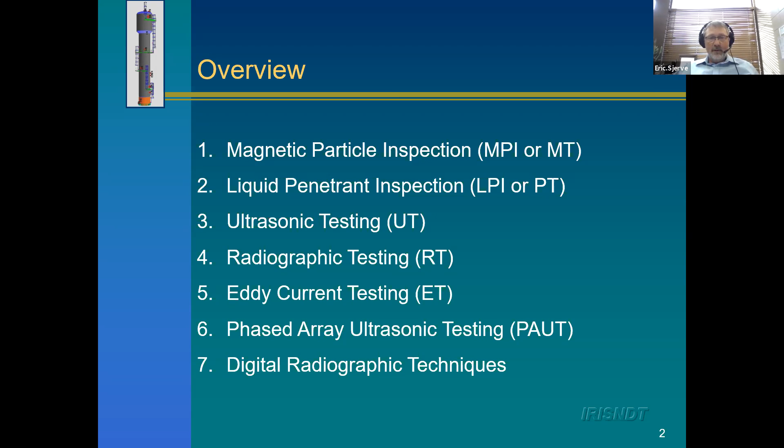All right, so the first one I'm going to cover is magnetic particle inspection. In Canada, we call that MPI. In the US, we call it MT, which is magnetic testing. MT is common in Alberta because we use American codes for most of the work we do, so you'll see that term MT. This is a technique that only finds defects that break the surface, and it can only be used on ferromagnetic materials. It can't be used on non-magnetic materials like stainless steels or aluminums. It has to be things like carbon steel.

With this technique, all we're doing is magnetizing the volume of the material, and that magnetic field is also with the surface of the material. If there's a surface breaking crack or defect, it's going to expel some of that flux. Then we put a powder or some sort of magnetic material on the surface, and wherever that flux is expelled, the powder will congregate and we'll visually see the defect.

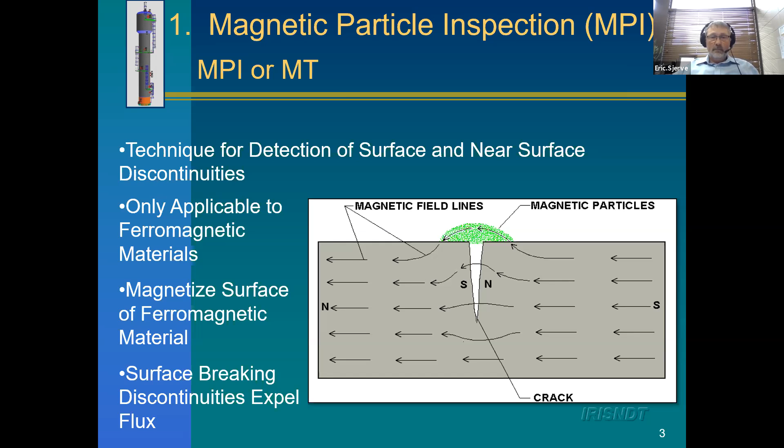So in Alberta, most of the applications use that yoke, which is the red thing on the right. All that is, is one of those prongs that sticks down as a north terminal or a north pole, one's a south pole. You touch it on the surface and it generates a magnetic field in the part. It's very flexible - we can use it in all kinds of constricted areas, on different configurations of welds. And it's good in the cold, good in the heat - it's just easy to use.

So most of the work is done using that yoke on the right. We also have big benches like on the left, but those aren't as common because most of the work in Alberta is done out in the field, which is good for those yokes.

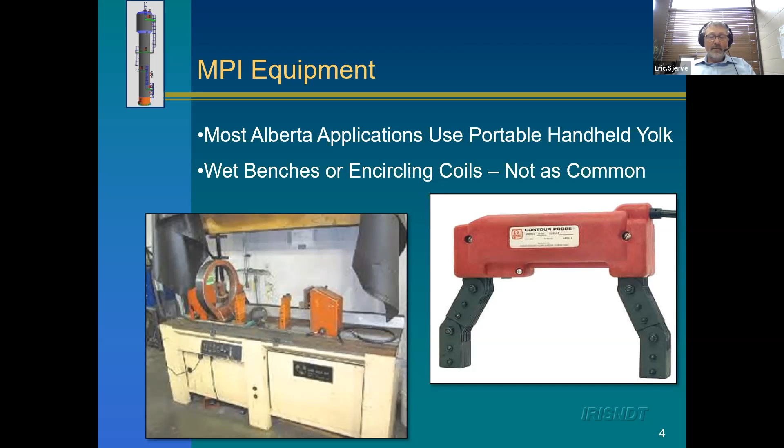And then these are what the magnetic particles look like. At Iris NDT, we just buy them by the truckload and we mix all of it ourselves. But that's just fine powder that's magnetic, so it's going to congregate at those north-south magnetic poles where there's defects on the surface.

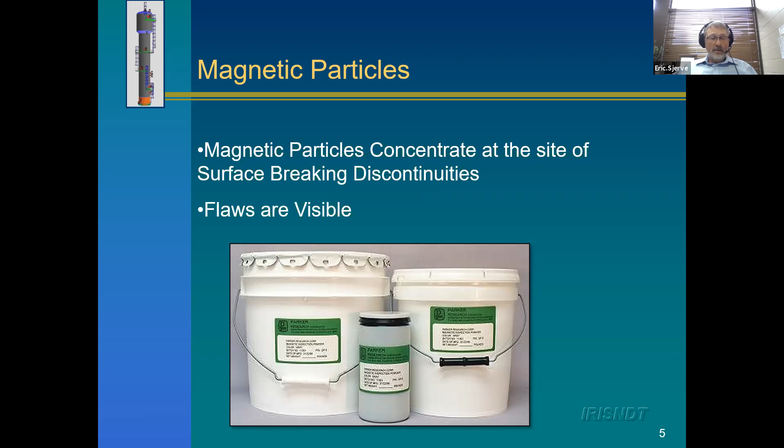So for magnetic particle, we have two ways of doing it. We can do what's called a dry magnetic particle inspection, where we spray a white paint on the surface and use a powder that's dusted on the surface. That powder will congregate where we have defects that break the surface, and we'll visually see the defect. This is good for rough surfaces, and it's good for high temperatures because there's no liquids there to boil off, so we can use it at high temperatures.

We also use wet magnetic particle inspection, and that's a higher sensitivity technique.

So we got a question here: what is the powder made of? I think it's iron oxide for the most part - small magnetic particles, and I think a lot of it's iron oxide.

With wet magnetic particles, we use the same iron oxide as the magnetic particles, but we put it in an oil or water, and it's fluorescent. This has to be done in the dark, and then we use an ultraviolet light to visually see the defects. So wet magnetic particle is more difficult to do because you can't have light and it can't be done at high temperatures, but it's more sensitive.

And in NDT, sensitivity is the ability to see small defects. So it has better ability to see small defects.

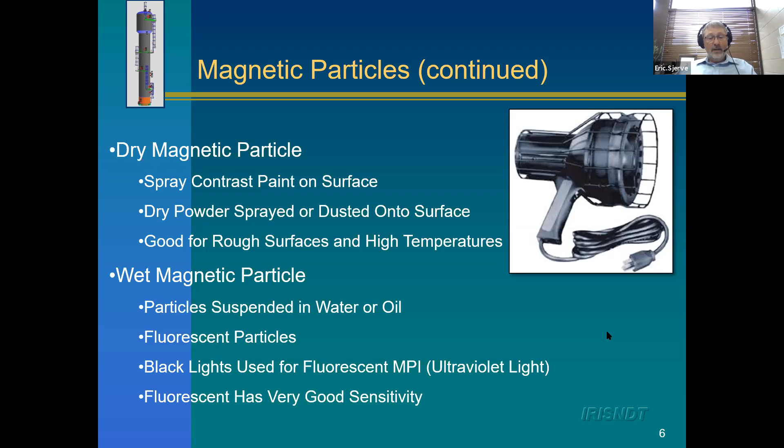With calibration, there's two parts to it. We have to calibrate the yokes, so that just has a magnetic field. Those yokes, if they're working properly, can lift a certain amount of weight. Before a technician goes out and does this work, they calibrate based on the amount of weight that it has to be able to lift. And then the black lights, which are the ultraviolet lights, have to emit a certain intensity of radiation. So you have to have enough ultraviolet light to see the defects. That's what technicians will do before they go out - they'll calibrate those and it'll be on the report that they meet calibration standards.

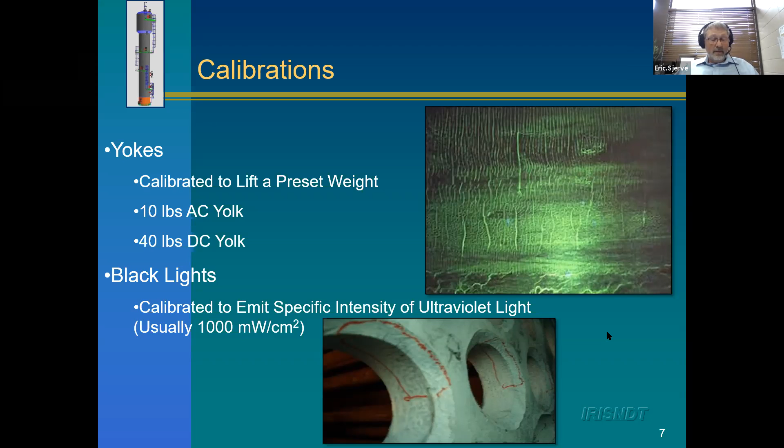So codes - this is kind of going to be the way the codes go for all these techniques. The main code that's used is the ASME code, which is the American Society of Mechanical Engineers. Most of that code is about construction, but Section 5 is all about non-destructive testing. Section 5 is built up of many different articles that all deal with the different types of inspection, and Section 5 is procedural.

ASME Section 5, Article 7 is the part that deals with MPI inspection. When I say procedural, what I mean is it tells you how to configure the inspection, how to set it up, how to calibrate, how to do the inspection when you're in the field, and what variables need to be included in the report.

And then ASME Section 8 has the acceptance criteria. Like I said earlier, we don't want to be so sensitive that we're calling all kinds of small defects that aren't a problem for fitness for service, but we also don't want to be so insensitive that we're missing big defects that will lead to failure. So Section 8 tells us what is acceptable and what is not once we've done our inspection.

Essentially it says that linear indications like cracks are usually rejectable if they're more than a certain length. And rounded indications are rejectable if there's groups of them or they're bigger than 3/16 of an inch. That would be things like porosity that have come to the surface of the weld and frozen in.

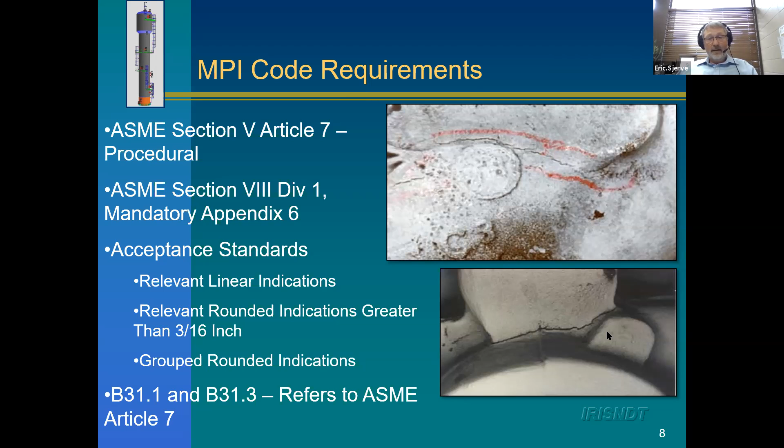And then this is the advantages and limitations. With MPI, that's probably the most common technique you're going to see in Alberta. It's cheap, relatively cheap, it's fast, it can be done in all weather conditions. There's lots of people trained in it, and it's great at finding surface breaking defects.

So it's used all the time for new fabrication, which is looking for defects that may be there in the welding process with new parts. And it's used all the time for in-service inspection - things like looking for vibration to see if you have fatigue cracking. Limitations: you have to clean the surface, it's not going to find anything subsurface, and there's temperature limitations.

So that's a quick summary on MPI. And that's, like I say, probably the most common technique we see in Alberta.

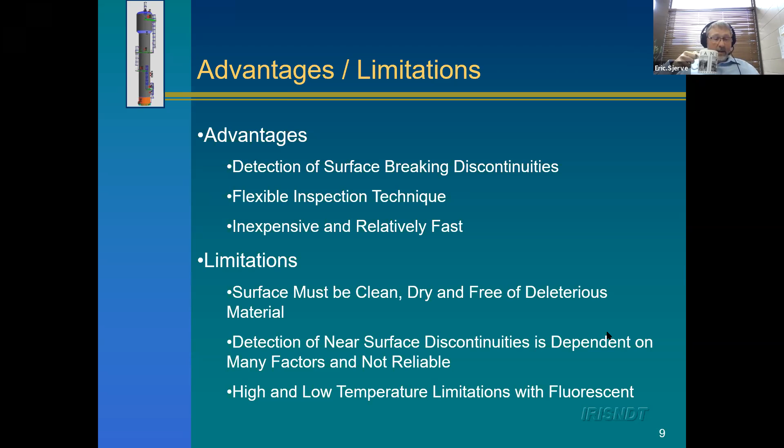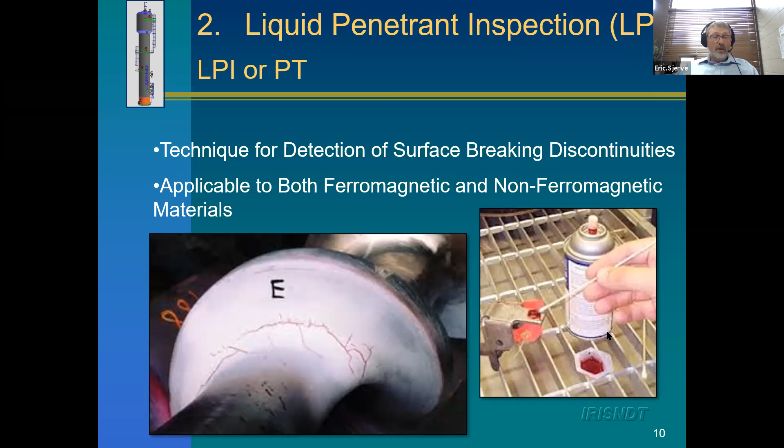So the second technique we're going to talk about is liquid penetrant inspection, which is LPI in Canada, or penetrant testing, PT in the US. And with those ASME codes, it's all PT. This is the same kind of deal as magnetic particle inspection - it only finds surface breaking defects, and usually it's used on non-ferrous materials because you can't do MPI on that. You can use it on both ferromagnetic and non-ferromagnetic materials, but it's more expensive than MPI, so we typically only see it on non-ferromagnetic materials.

So this is really a capillary action type thing where we put a liquid on the surface that has a low viscosity. We clean the surface really well, we put this chemical dye on the surface, we let it sit for a while. Capillary action will draw it into any surface breaking defects. We just wipe the excess dye away from the surface, and then we use a developer to show us where the defects are.

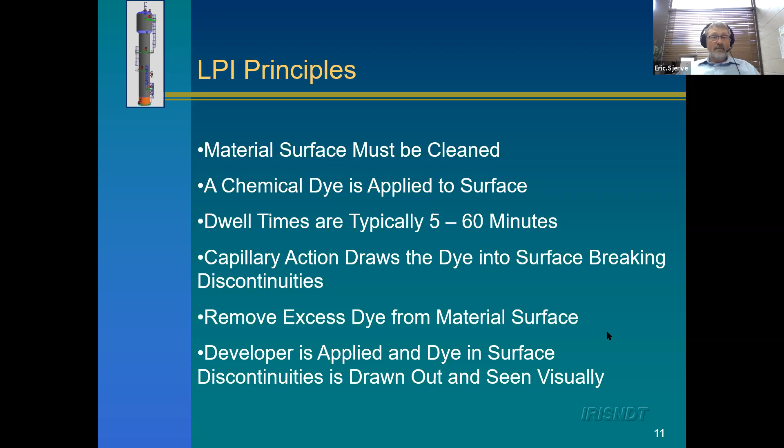So LPI is a similar inspection to MPI in that it will only find surface breaking defects, but the physics is different - it's a capillary action inspection rather than a magnetic inspection.

So with this, it's really the same as MPI. There's a visible penetrant, so that's just visible where you use it on a surface and you see the cracking. And then there's a fluorescent penetrant, and that's the same kind of deal as MPI where you need an ultraviolet light to show where the defects are on the surface.

They're both visual, so it's just done visually - you just look and see where the penetrant is. And like with MPI, the fluorescent penetrant is more sensitive. It takes longer to use, but it's more sensitive.

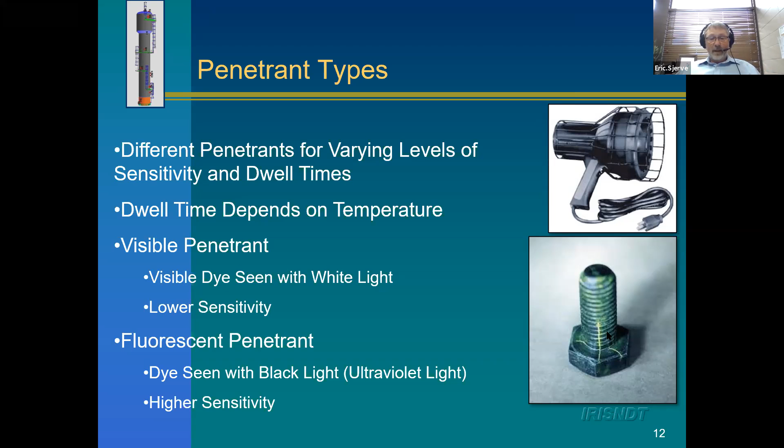This is very similar to MPI. Instead of Article 6 being MPI, here Article 7 is MPI and this is Article 6. So ASME Section 5, Article 6 is the procedural part, telling how we calibrate, how we do it in the field, what needs to be included in a report when we do the inspection. The acceptance criteria are in Section 8, same as with MPI.

Like MPI, B31.1 and B31.3 refer back to ASME. So as an engineer, if you want to know if that LPI inspection and report were done right, you go to Article 6, and that tells exactly how it should be done, how it should be calibrated, and what needs to be in a report. That's how you would audit an LPI report.

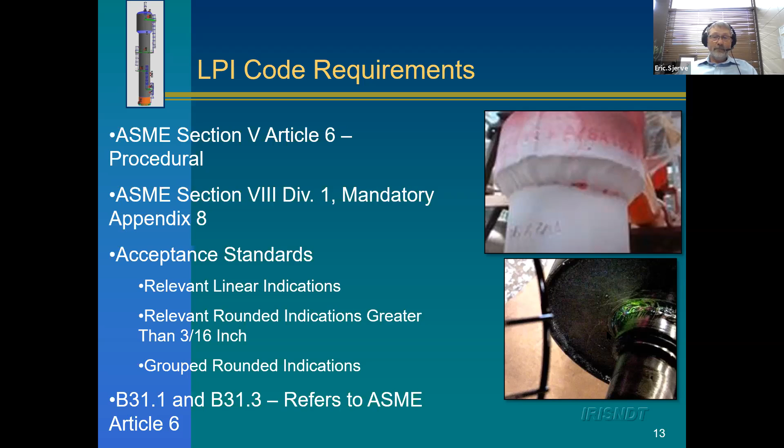The advantages and limitations are a little different than MPI. With LPI, it's a liquid, so we can do it on any material shape. It's inexpensive and relatively fast, but slower than MPI and more expensive, so we tend not to do it. If we can, we'll do MPI instead.

It's only sensitive to surface breaking discontinuities. It's very portable. As for limitations, surface cleanliness is critical. You have to clean the parts far more than MPI, because the dye needs to penetrate any surface breaking defects. All paint, everything has to come off the surface down to bare metal. It's not going to find anything below the surface.

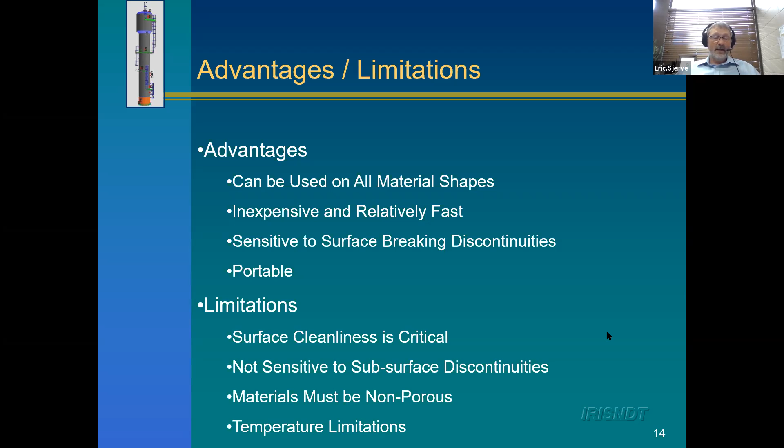The materials obviously have to be non-porous, and there are more stringent temperature limitations. You have to have the right viscosity or it won't soak into the surface breaking cracks. So that's a quick rundown on LPI.

Now we're going to talk about ultrasonic testing. There are two main techniques for detecting surface breaking defects, MPI and LPI. Then there are two main techniques for inspecting the full volume of the weld, not just the surface but everything subsurface. UT is one of those.

With ultrasonic testing, we send high frequency sound waves into a material, generating those sound waves with a piezoelectric crystal. Then we're using Snell's law.

Snell's law is just refraction. If we want to generate an angled sound beam, we put a wedge on it like that bottom picture, and we get an angled sound beam in the material. The angle is based on Snell's law, which is kind of what you see in Pink Floyd's prism - you get different refraction based on different angles.

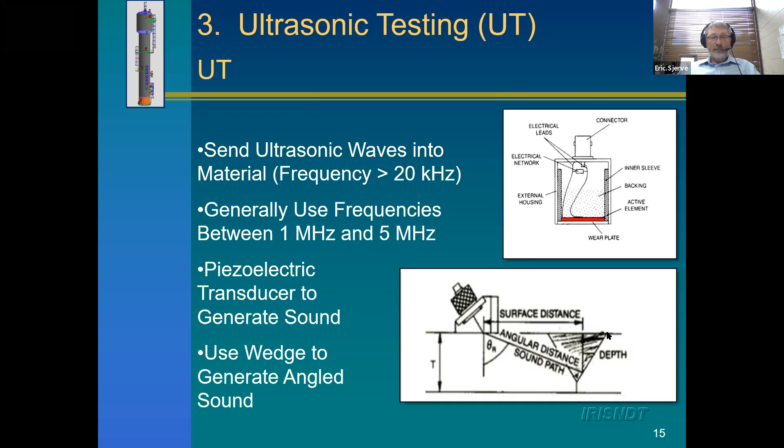With UT, there are a couple of things I see that result in bad work. We have to have isotropic materials. Carbon steels are almost always isotropic, but austenitic steels aren't, so you have to be real careful when doing ultrasonic testing on austenitic steels. That can lead to all kinds of bad work being done, and the code talks about that in the ASME code.

With ultrasonic testing, all we're doing is sending ultrasound into the material, maybe a carbon steel. If there's a defect there, some of the sound reflects back to our transducer. We see a signal, and the codes tell us how to interpret that signal, as maybe a discontinuity that's not going to lead to failure, or maybe a defect that needs to be repaired. That's what we're doing with ultrasonic testing.

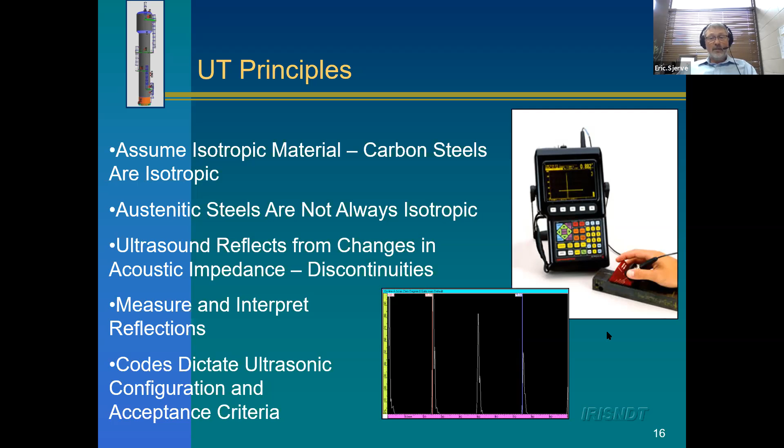The main display in ultrasonic testing is an A-scan. The y-axis has ultrasonic sound pressure, which is just the size of the signal. The scale on the x-axis is time, or since we know the velocity of the wave, it's distance into the material. That's the main display you'll see. Typically, bigger signals come from bigger defects, and smaller signals are from smaller defects. That's typically how this inspection is done or interpreted.

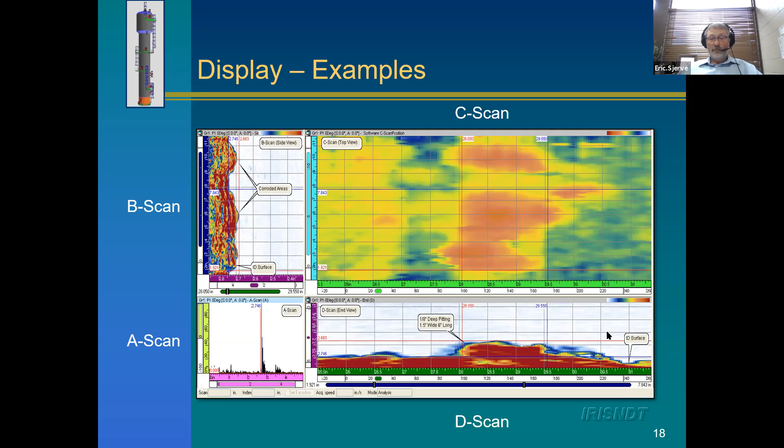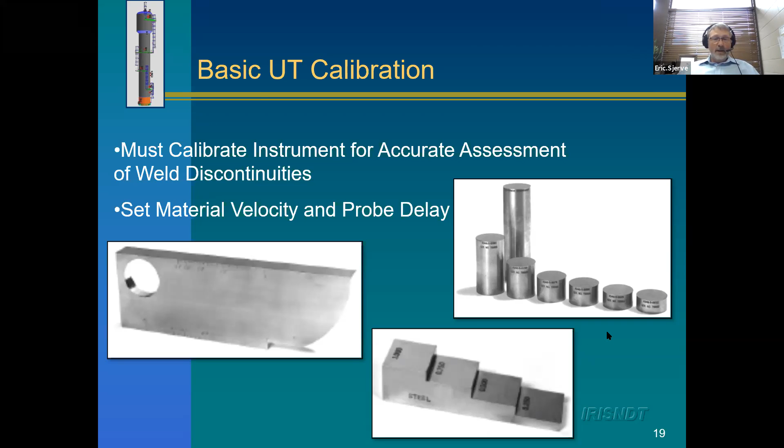So there's a couple of ways this is calibrated. The first part is we need to know the velocity of sound in the material, because we can't position defects properly unless we know the velocity. These are the calibration blocks we use to set the velocity, and then we can calibrate that probe so we get the proper depths when we do an inspection. So we know the thickness of the pressure vessel is 10 millimeters and not 20, because we need to calibrate it. That's the first part of a calibration when you do ultrasonic testing - you have to set the material velocity. The probe delay is how much time the sound takes to get out of the ultrasonic transducer, because you don't want to take that into consideration during the inspection - you just want to know the material you're inspecting, not the probe. That's a y equals mx plus b type calculation, and that's the first part of calibration in ultrasonic testing.

The second part is the sensitivity. Once we've calibrated the transducer and we know the y equals mx plus b - the velocity and the delays - we have to make sure we have the right sensitivity, because we don't want to do an inspection and end up calling very small defects that aren't a problem for fitness for service. We also don't want to miss very big defects. So we need to do sensitivity calibration, allowing discontinuities to stay in the material that are fine, while making sure the customer knows when there are repairs needed and it's not safe to operate that vessel. That's what this calibration is.

It uses a block called an ASME block, which is part of the code - it's described in the code. That allows us to set the amount of sound pressure, the y-axis of that graph I showed you, so we can do a proper inspection and know what sensitivity we have. Then there's a distance amplitude correction curve - as sound goes farther into a material, it attenuates and spreads out, so we have to do that sensitivity calibration at different depths, so we get the same sensitivity close to the probe as we would far away from it.

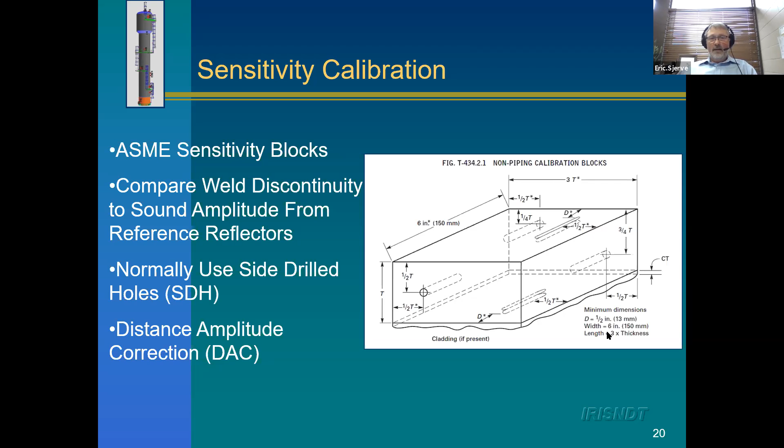Once we've done those two parts of the calibration, the ultrasonic system is calibrated and we can do the inspection. You should always see on any report for an ultrasonic inspection that there's information and description about how the calibration was done.

So in Alberta, a lot of what we do is manual UT, and that's just where the probe is held by someone's hand. They're interpreting that first graph I showed you, which is the sound pressure versus time, and you're getting a paper report that describes it.

And then there's also fully robotized systems where you put them on a piece of equipment, they move on their own, they gather all the data, it's 100% repeatable, and it's 100% recorded on a computer for analysis and archiving. That would be mechanized testing, so AUT. AUT stands for automated ultrasonic testing.

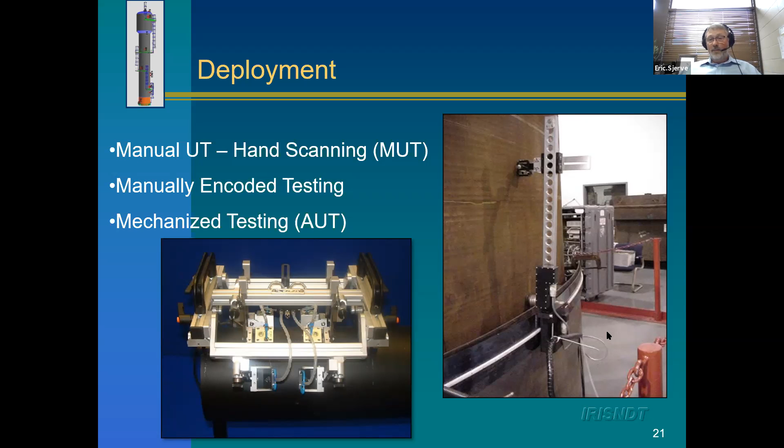So a lot of the work would be manual UT because that's less expensive. And then some work would be AUT, where a customer wants to do a full fitness for service and they want the data archived. If, for instance, they're doing inspections where they've got a defect they're monitoring every couple of months, they would do an AUT inspection where they can compare the full data sets and have full reproducibility.

With the code requirements, it's very similar again. ASME Section 5 is the procedural part, and for ultrasonic testing, it's Article 4. Article 4, like the last two examples, tells the technician how do we set the ultrasonic system up, how do we calibrate the first part for velocity and delays in the probe, how do we do the second part of calibration for sensitivity, how do we perform the work in the field, and what do we need to include in a report. That's all in ASME Section 5, Article 4.

Now, ASME Section 8 has the acceptance criteria for ultrasonic testing. So whenever a technician finds a crack, lack of fusion, or incomplete penetration in a weld, it's unacceptable. Those are all stress risers, and those all need to be repaired. And then for volumetric defects like slag and porosity, signals greater than DAC with a length criteria are rejectable. That comes out of ASME Section 8. And then, like the other examples, B31.1 and B31.3 refer back to ASME Article 4. Those are the piping codes.

So advantages and limitations: ultrasonics is really good at finding linear flaws. So for in-service inspection, where cracking is something you expect in a weld, it's really good at finding it, or in your base material. Automated techniques are really good. Ultrasonics is really your only choice for fitness for service because it gives the depth information.

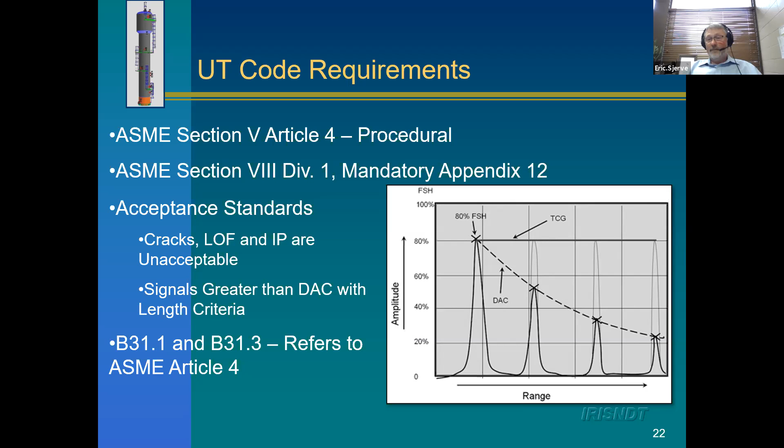So I hope that answered the question. I guess it's hard with Zoom to know, but hopefully that answered the question.

The other advantages of ultrasonic inspection are that it's good on thick materials, but not so good on thin materials. So when you get to really thick welds, it's really what you do 100% of the time. You want to always do ultrasonic inspection.

For limitations, you have to do a fair amount of surface preparation before you do ultrasonic inspection because you have to couple the sound in, and that coupling has to be consistent, so you can't be on a bad surface. It's difficult at high temperatures. You can't do it well on coarse grain materials like stainless steels or Inconel alloys. And if you do manual UT, you've got no permanent record. So those would be the advantages and limitations of ultrasonic inspection.

And like I say, with coarse grain materials, that's an example of bad work. Customers will call for an ultrasonic inspection, someone will come out and do it, but it's not clear there's any value there. So as engineers, you need to know what it's good at, but more importantly, you need to know what it won't do.

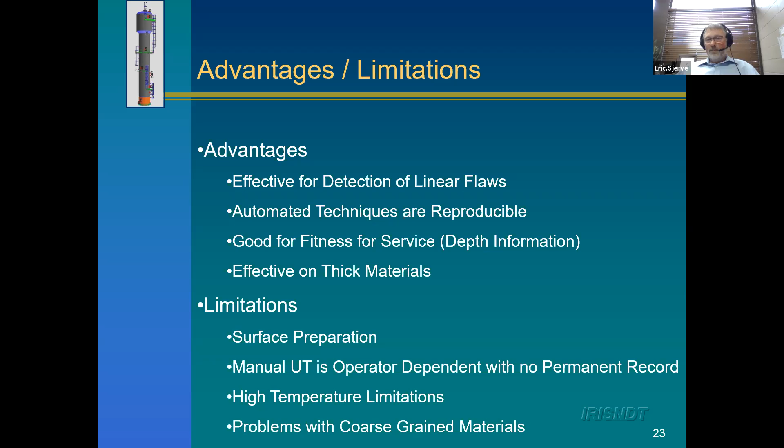With radiographic testing, we've got two techniques that can give us a full volumetric inspection, meaning they inspect the surface but also the whole volume of whatever we're inspecting. Ultrasonics is the first one, and radiographic testing is the second. With radiographic testing, the advantages and limitations are almost exactly the opposite of ultrasonics, so the two techniques fit really well together.

With radiographic testing, we use film. The film has different speeds, so grain size would be like an ISO speed on a camera film. We take high energy radiation and expose that film, which gives us a picture of the weld or the pressure vessel or pipe or whatever we're inspecting. We tend to use lead shielding to protect against the radiation.

The question is, what is meant by fitness for service? Aren't NDT methods checking that the defects won't interfere with service? With non-destructive testing, we strictly detect the defects that are there. That's all we do. We don't make any comments on whether that defect is fit for service. All we're doing is inspecting something and coming back to our customer saying there's a defect there of this size, or there isn't a defect there of that size.

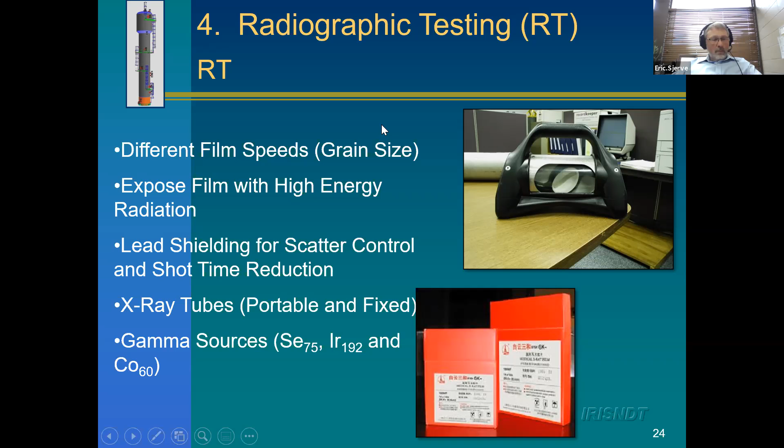All right, so we'll keep going with RT. With radiography in Alberta, we can generate the radiation with X-ray tubes, but that's not so easy in our environment because it's cold out and we've got a lot of work in difficult environments, and X-ray tubes are delicate.

So most of the work we do uses what we call gamma sources. These are small radioactive pills that produce radiation, and there's three of them typically used in our business: cobalt-60, selenium-75, and iridium-192. Iridium is by far the most common one. Cobalt-60 has much, much stronger energy and can penetrate much thicker materials, while selenium is the weakest energy and can only penetrate very thin materials. It's just a physics thing.

The shorter the wavelength of your radiation, the higher the energy and the deeper the penetration. Cobalt-60 has the shortest wavelength of those three sources, so it has the highest energy photons and can penetrate the most material. Iridium is in the middle. In our industry, we don't really see selenium much in Alberta.

Cobalt 60 is used when steel is about 2.5 inches and up. The thickest materials I've ever inspected are a foot, so almost 300 millimeters of steel. Iridium is used from 2.5 inches and down, so iridium by far is the most common one you see in our industry, or in Alberta.

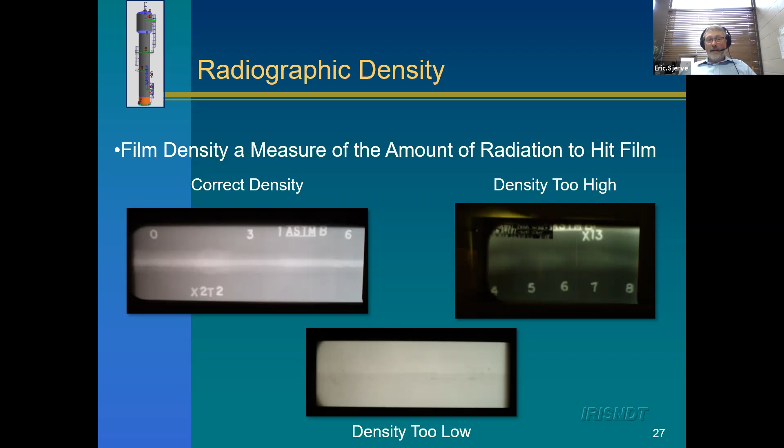The other thing we deal with is sensitivity. Just like with ultrasonic testing, where we had the second part of calibration dealing with sensitivity with the ASME block, with radiography we need to know what the sensitivity of the technique is. Just like the other techniques, we don't want to tell the customer there's all kinds of super small defects, and we don't want to tell them they're rejectable, but we also don't want to be so insensitive we're missing big defects that will lead to failures. We do that with something called an IQI, which is an image quality indicator, and those are just wires of different diameters.

With weld exposures, this is the same kind of thing I just showed you. When we're doing welds, we can shoot them with the source right up against the pipe and the film on the far side, which is that contact exposure on the far left. We can also shoot them in a superimposed or elliptical exposure, which is when the radiographic source is further away. Typically we do contact exposures for all the bigger diameter pipe, and elliptical exposures for the small ones.

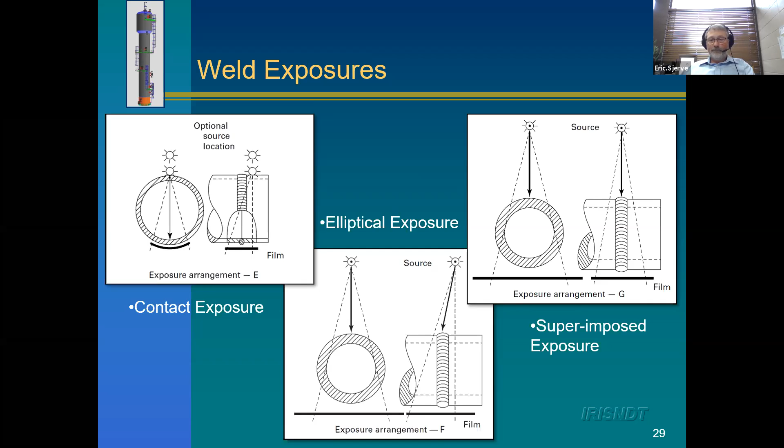This is almost exactly the same as ultrasonics. It's section 5, article 2, that's the procedural part of it. That's the same as the other techniques, where that tells us how to set it up, how to calibrate radiography, what we have to report, how we do the weld inspection, whether it's contact or one of those other techniques - all of that is in article 2, section 5. Then section 8 is the acceptance, and that's very similar to ultrasonics. Like ultrasonic inspection, the piping codes refer back to ASME.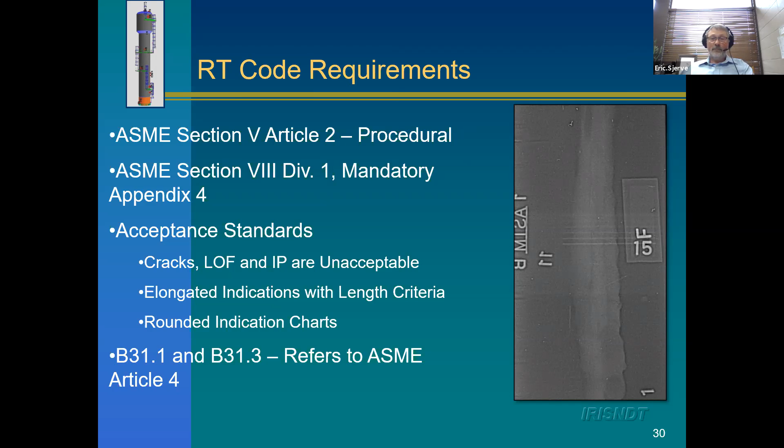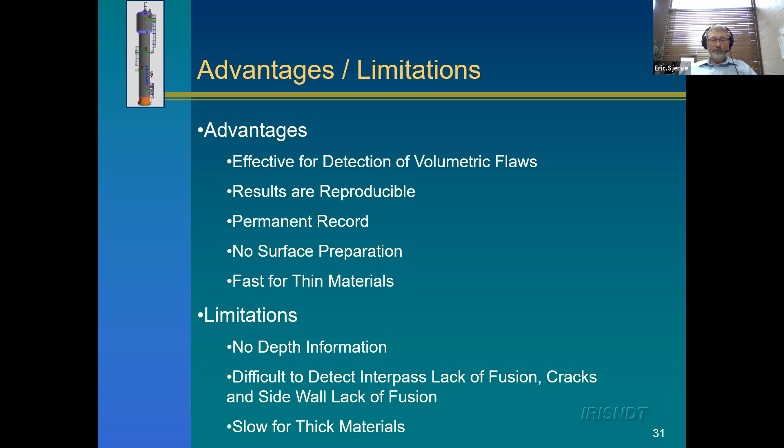So that's radiographic inspection, and my apologies for going quick—there's a lot here, so I'm just blasting through it. From an engineering perspective, the details aren't as important as knowing you can look in the ASME code to see what a good inspection is, knowing the advantages and limitations, and what a proper calibration is.

So the last inspection that's part of the regular ones—there are 5 inspections governed by the Canadian government, so people are certified, courses are given, and they control the certifications in Canada. This is the last one of those 5, and that's eddy current testing. This one is not done much in Alberta, and I'll talk about why later, but it's done for heat exchanger tubes. We don't see it too much in our industry other than for heat exchanger tubes.

For this one, we're putting an electromagnetic field into the material, and it breaks down really nice with physics. The first technique was MPI, a magnetic field. The second was LPI, capillary action. The third was ultrasonic testing, vibrations in the lattice. The fourth was high energy photons, which is radiography. And this is an electromagnetic inspection technique—so it's kind of covering the different physics fields we could use.

So for this one, we're putting an electromagnetic field into the material, and we can only do it on conductive materials. It can be done on steel, aluminum, titanium, things like that, but we can't do it on anything that's non-conductive. So we can't do it on composites, rubber, and things like that.

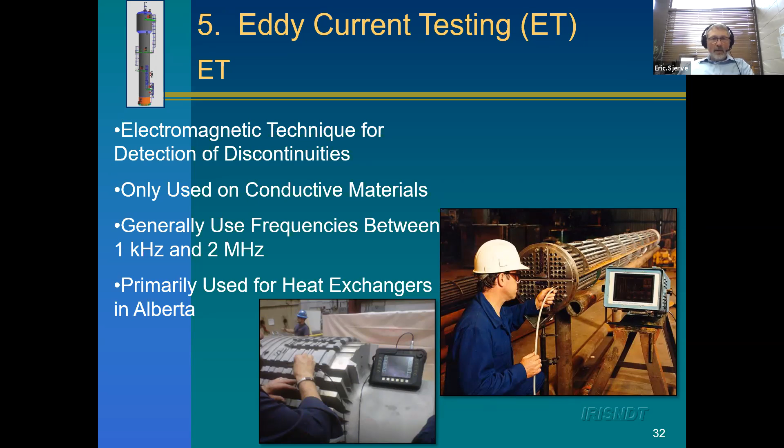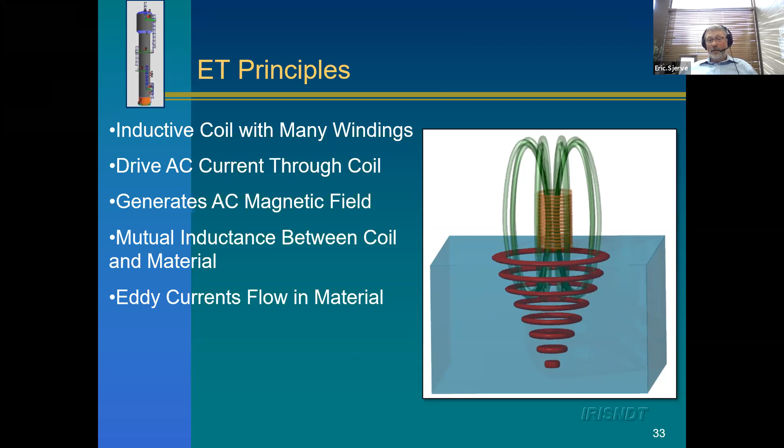So this is mutual inductance—exactly like a transformer. We have a primary coil, which is our eddy current testing probe. We pass an AC current through that probe, and if that probe is close to a conducting surface, it generates an electromagnetic field in the part we're inspecting, and that causes eddy currents to flow in that part. If there's no defect, the eddy currents will come to some steady state, and that's what we see. If there's a defect, it's going to disrupt those eddy currents, and we're going to see a change in our electromagnetic properties. That's what eddy current is from a physics perspective.

So this is how we would inspect a heat exchanger. A heat exchanger has many tubes, and the tubes tend to be really thin—that's where we have maybe a hot product on one side and a cold product on the other, and we want to transfer heat from something hot to something cold. We do it all the time in industry; it's a very common thing to have heat exchangers, and we need to inspect those tubes.

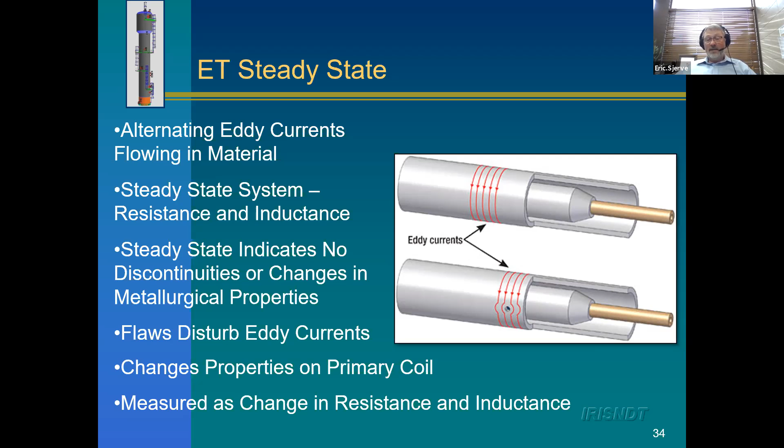So in this case, we have eddy currents flowing around the circumference of a tube, and they're in steady state. If there's a defect or discontinuity, it forces those eddy currents into a different path, and by forcing them into a different path, it disturbs them and changes the electromagnetic properties at our coil. We see that as a change in resistance and inductance in that coil. With eddy current testing, we're using something called a Lissajous plot—that's really the inductance versus the resistance that primary coil is experiencing. Resistance is the real component of an impedance, and inductance is the imaginary component of an impedance, so really the inductance has the phase information.

So what a technician is doing with eddy current is balancing the probe, so they know what the signal is on a part of that tube with no defect. If they see a change in that Lissajous plot—the real versus imaginary components—then they have to interpret it as a defect or a discontinuity. That's what we're doing with eddy current.

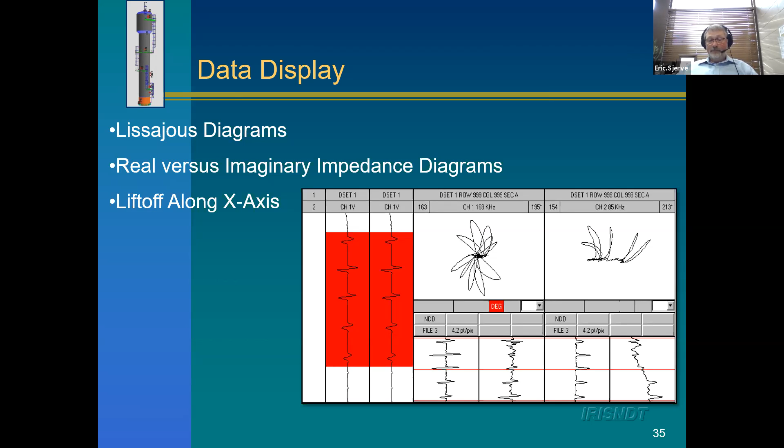Now, up until now, we've kind of been dealing with absolute calibrations. With radiography, we were trying for 2% sensitivity on the full thickness using those wires, and that's an absolute thing. With ultrasonic testing, we're calibrating the y equals mx plus b, which is your velocity in your material and the delay in your probe, and then we're doing a sensitivity calibration, and that's absolute too.

With eddy current, there's no absolute calibration. It has to be a comparative technique. It's a comparative calibration. So all we can do for eddy current is we have to have a material that has exactly the same metallurgy, exactly the same heat treat properties, and we machine defects into that material, and then we calibrate our eddy current system based on those artificial defects in a part that has exactly the same geometry, exactly the same metallurgy, and exactly the same heat treatment.

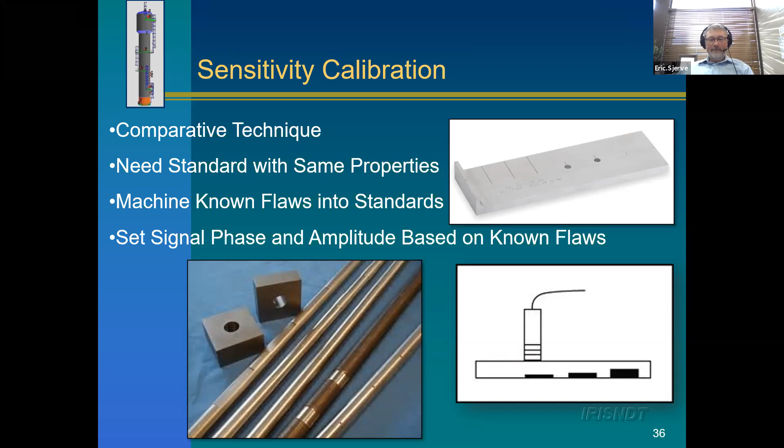And then when we go into an inspection in a heat exchanger, what we're doing is we're comparing signals from that heat exchanger to that artificial calibration standard. So that's how we're calibrating eddy current. And that's a bit different than the other techniques because it's not an absolute calibration. It's strictly a relative calibration where if we don't get that calibration piece correct, nothing is correct. So it's really important to have the right calibration piece with the right heat treat properties, the right metallurgy, the right diameter, thickness, and everything. If you don't do that, the whole inspection is flawed.

Now, the codes are a little simpler, so we don't use this so much in our industry. Article 8 deals with eddy current, but it just doesn't have the detail that the other articles have because it's not a common technique that we see in our industry. And we don't have acceptance criteria in ASME Section 8 because we never use it for new fabrication. It's always used for in-service inspection. So the code requirements for eddy current are a lot less detailed than the other techniques just because it's not used as much. And the main reason it's not used is because we can't penetrate thickness well.

So most of the components we use in the industries we have in Alberta are thicker, and eddy current just doesn't penetrate thick. If you can go 2.5, 3 millimeters deep into a part, that's really good, that you're doing well with eddy current if you do that, but that doesn't cover much of what we have here. So it's used for heat exchangers for the most part, and we just don't see it in other parts of industry in Alberta because it just doesn't have the ability to penetrate the kinds of depths we have.

Where it's used a lot is the aircraft industry. So they tend to have thin aluminum parts, so you can penetrate them, and titanium and things like that are really good. They really fit eddy current well. So eddy current's extremely fast. It can find surface breaking defects and subsurface defects very fast in aluminum skins and landing gear and things like that. So you see it a lot in the aircraft industry.

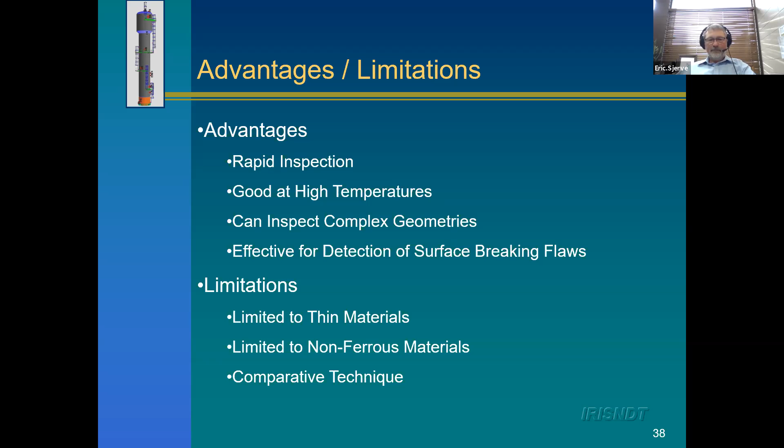All right, so that's the 5 basic NDT techniques that are governed by the government of Canada, and those are the common ones. And you'll see those quite a bit. Other than eddy current, you'll see all of them regularly.

Now, when Patricia and I first talked about this, he wanted me to put some advanced techniques in. So I picked two that are very common as well. So I'll spend a bit of time talking about phased array inspection and then a bit of time talking about digital radiography. So with phased array inspection, it's really the same as ultrasonic inspection, except we don't have a single piezoelectric crystal, we have many.

So all of that stuff I already talked about with ultrasonic testing, there's one piezoelectric crystal and you put it into an ultrasonic probe and that gives you one sound beam. By that I mean there's one frequency, one angle, one beam property in terms of whether it's spreading quickly or not spreading. It might have a focus. All of that, you just get one property out of the probe and it never changes.

With phased array, we take the piezoelectric crystal and cut it into many small pieces. That gives us the ability to control or engineer the sound beam. And that's why people like phased array - not because it does anything different than regular inspection, but because we can engineer the sound beam to fit whatever inspection we're doing.

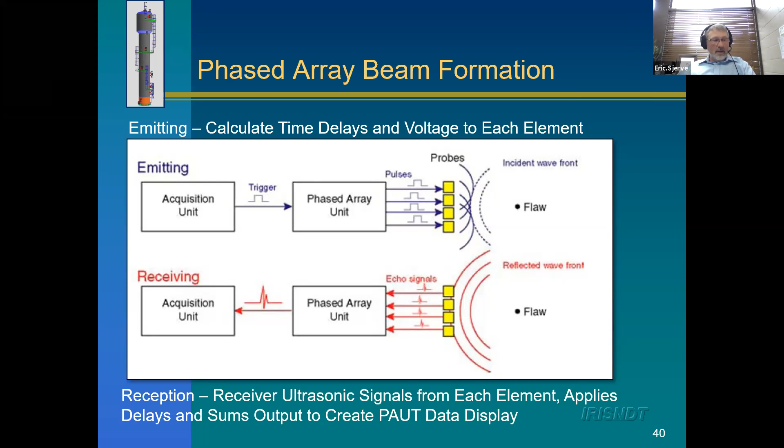So this is essentially the word part of that figure. What we're doing is pulsing those elements on different time delays. We may put different voltages on the different elements. And on the receiving side, when we get reflections from the material, we may put different gains - we may amplify the signals from different crystals differently.

And when we do all of that, what we're doing is generating a focal law. So that might be generating a beam that has a certain angle, a certain focal property, a certain sensitivity to a certain type of defect.

This is probably where it kind of hammers home. What we can do is generate different sound beams by pulsing those crystals and receiving the sound in different ways. In this case, we've got a bunch of different elements, but we're only firing 4 of them. And because we're only firing 4 of them, we can move that sound beam back and forth electronically. If I was doing this with a regular probe, I'd have to move the probe by hand, whereas now I can control it electronically.

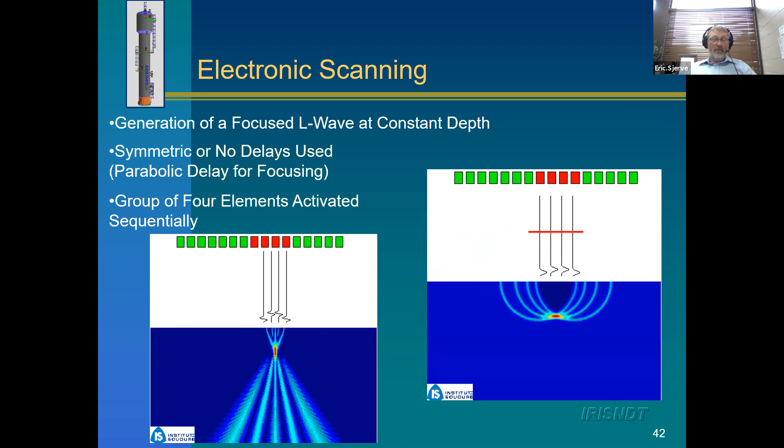So that's useful. All of a sudden I can do this electronically, which means I can do it super fast and well controlled.

I can also generate angled sound beams. Suppose I pulse - those little pulses show the time delays I'm giving to the crystals. If I start to delay the sound to adjacent crystals, I can generate an angled sound beam. That means I'm pulsing crystal number 1 a little before crystal number 2, and pulsing crystal number 2 a little before crystal number 3, and all the way down the line, I can generate different angles. So for the same probe, I can now move the sound beam back and forth, and I can generate any angle I want.

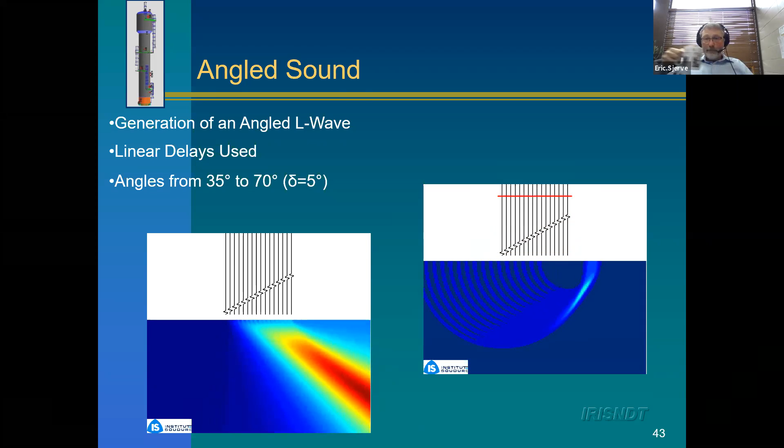The other thing I can do is generate different focal properties. Here, what we're doing is pulsing the outside crystals before the inside crystals, and that generates a converging sound beam, which means I'm focusing it. I can change where the focus is, and I can change what the depth of field is, just by pulsing these crystals differently.

So I got a question here: what is the typical size of one of these units? A standard ultrasonic probe might be something like 10 to 15 millimeters in diameter, something that's easily held. A standard phased array probe would be maybe 25 millimeters long and maybe half or 10 millimeters wide. And inside that would be 16 elements.

So it's a little bigger, but it's certainly not 16 times bigger if you have 16 elements. They cut these individual elements pretty small. And then with phased array probes, we can get all kinds of different sizes. So 16 elements is about the smallest they produce, because anything smaller than that, you just can't generate these kinds of sound beams.

But you can go up to 256 elements. And at that point, it's such a big probe that nobody would be holding it. It would be on a robotic arm or something like that because it's too big. So hopefully that answers that question.

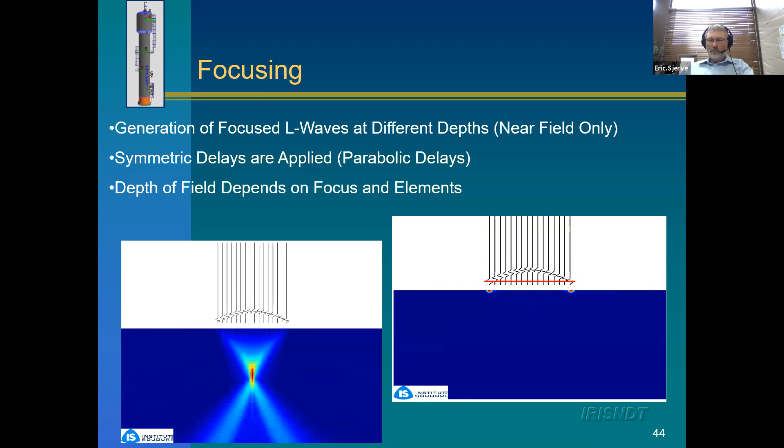And the real power of phased array is we can do all of it together. So we don't need to just move the sound beam and then do a second inspection where we have a different angle, and then a third inspection where we have a certain focal property. We can apply all that at the same time, and we can generate a sound beam that has a certain distance from the weld, a certain angle, and a certain focal property.

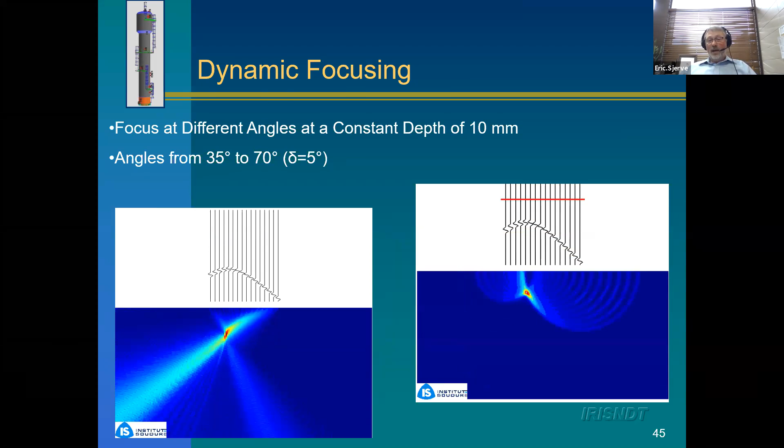And then we can generate another beam that might be a little different, and we can generate hundreds of these beams. So what we can really do is engineer the sound for the inspection that's being done. And that's really what we like phased array for, is we can look at a component, figure out where there might be a defect or how we're going to inspect it, and generate a really nice inspection plan using the different sound beams to cover the whole area.

So advantages and limitations we have. Phased array doesn't do anything different than regular UT. It's UT, ultrasonic waves. It just, with phased array, we have the ability to engineer the sound beam for our inspection.

And it's usually easier to interpret. When we have a full picture of everything that's going on, it's easier to interpret than that first image I showed you, the A scan. So it's good for interpreting.

And then limitations: it's harder to find people that are trained in this because it's an advanced technique. It's far more difficult for our customers to interpret the data because they don't have the training. Those are typically the problems we have - getting enough people to do the work and having customers that understand the results and trust them.

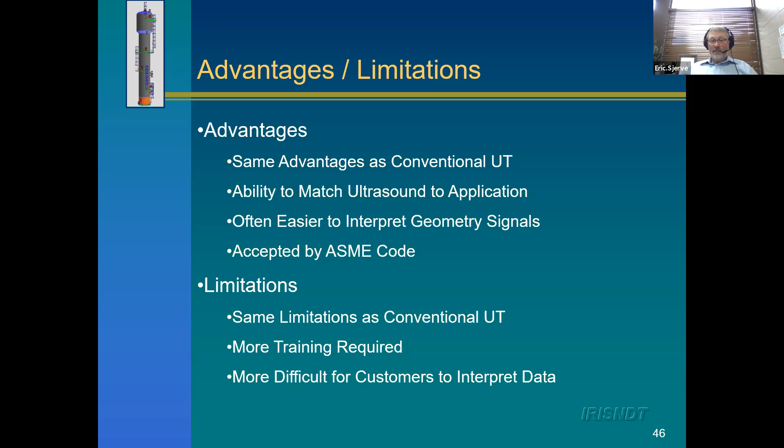All right, so the last technique I'm going to describe are the digital radiographic techniques. And if any of you have been unlucky enough to break an arm or a foot or a leg or something, you've gone into the hospital, and they don't have film anymore in hospitals. They have radiographs that come up on screens, and that's a digital radiography technique.

So rather than having a piece of film that we have to actually do a wet chemistry and develop, we can do radiography with computers where we have all the images on a computer, and that brings all the image enhancements to the table that we're used to seeing, right? We can do edge enhancements and color enhancements and darkening enhancements. And so we can pull a lot more information out of the radiography techniques using this.

So DR is digital radiography, and that's a lot like what's in your camera. Inside your camera is a small array that's light sensitive. And when you buy a 20 megapixel camera, that means there's 20 million pixels in that camera, and they all respond to light, and they build up a digital image of whatever you've taken a picture of.

This is exactly the same, except it responds to high energy radiation because we're using high energy radiation rather than light. So these techniques are done a lot like film. They work with gamma sources like iridium, they work with X-ray tubes, they work with LINACs, which are linear accelerators. We expose them

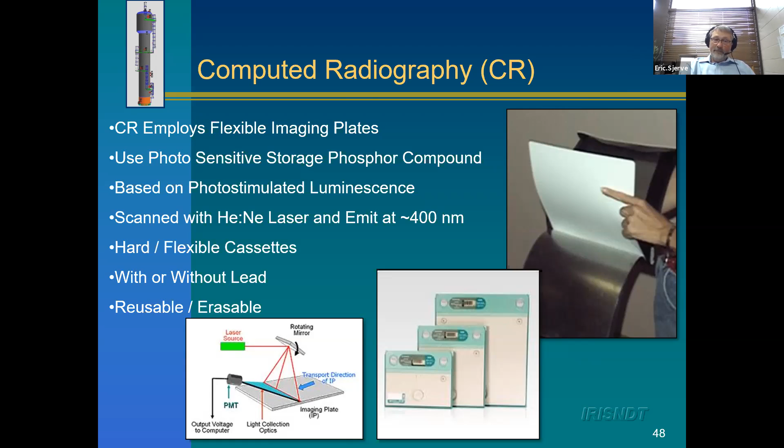And these are extremely fast systems. So with computed radiography, we expose it a lot like film, and we like it because it's the same procedure as we're used to. With digital detector arrays, we like them because they're fast. They're about 10 times faster than film. So we can take it into a customer site and be 10 times faster, which customers love. So for the right applications, we can be really fast.

But these systems are breakable, kind of like your camera, right? You drop your camera and you're done. You got to go buy another camera. These things are worth $120,000. So if we drop them, we've got a problem. But customers do like them because they're fast. So we take them out in the field, and we do work with them. We shoot castings with them, piping, all kinds of stuff. But we have to be very careful because if we end up freezing them or baking them or dropping them, then it's a big bill.

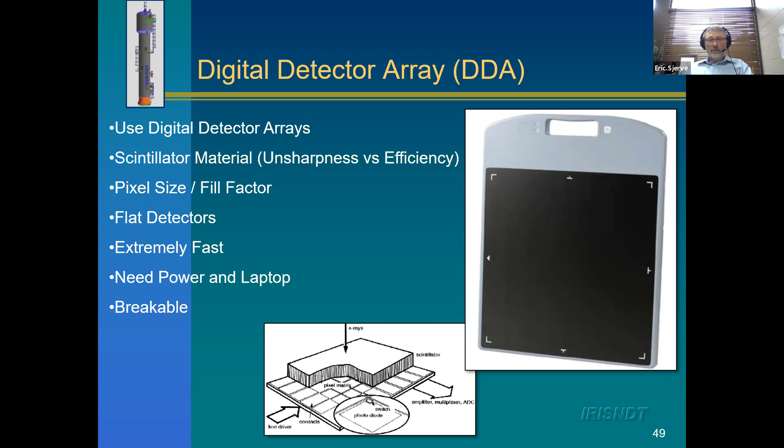And like I said, with these digital radiography techniques, computed radiography (CR) and DDA, they generate digital images, and we can pull a lot more information out of a digital image than we can out of a piece of film. So all the standard stuff you'd expect: we can do edge enhancements. So suppose we're looking for cracking in a casting and the cracking is fine, we can apply edge enhancements to try to bring out edges to find cracking.

Window leveling is the ability to look at certain parts of the radiograph. So suppose we have thin parts in a casting, medium thickness parts, and really thick parts. We can do one shot, and then window level it to only look at the thin part of the casting, and produce a radiograph for a customer to look at. We take the same radiograph and window level it to look at the medium thickness parts, do our interpretation, and produce a report and image for a customer. Then we can window level it a third time and look at the thick parts. So that's a really powerful technology that allows us to take inspections that would take many different exposures and do it in one exposure that's 10 times faster.

So one of our successes at Iris NDT is we took a casting that took 16 exposures, and we did it in 3, and those 3 were 10 times faster. So really, it's 0.3 — we went from 16 exposures to less than half the time it would have taken us to do one exposure. So it's like 30 times faster. So for the right application, we can do really well.

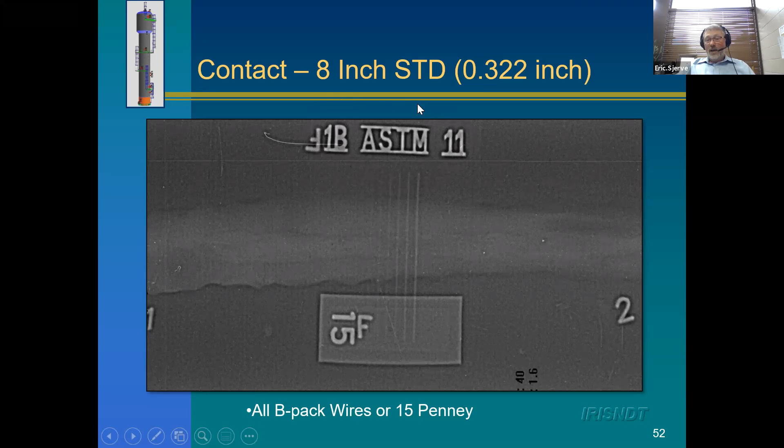And then this is our sensitivity - these are the wires on that penny, and we want to be sensitive to about 2%. We can just calculate it - 2% of that is what we want to be sensitive to. This is an ASTM B penny. There's a bunch of different wires, they don't all fit in one penny - there's 4 of them: an A penny, a B penny, a C penny, and a D penny. And this is the right thickness for this inspection.

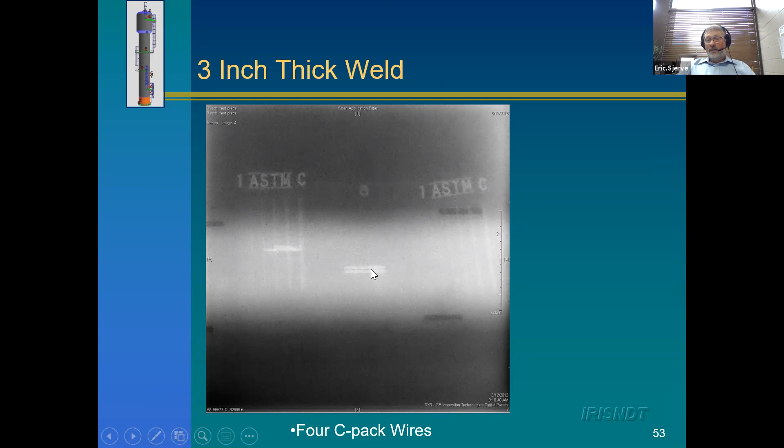And then this is another one I'll throw on here. This has a C penny because it's a thicker weld. In this case, this is the base material, which is darker. This is the weld reinforcement, which is white because it's a thicker material, meaning less radiation gets to the film. And this is actually - we've cut notches in this to be a UT calibration block, and these are tungsten rods in the middle of the weld for a UT calibration block.

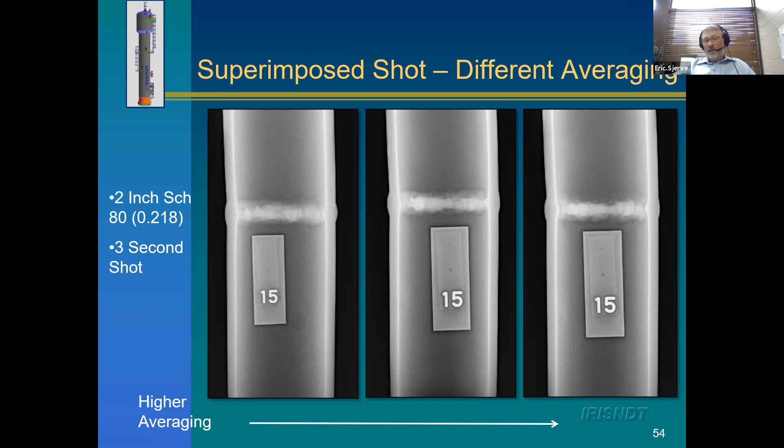So that's how it would compare to the radiographic techniques.

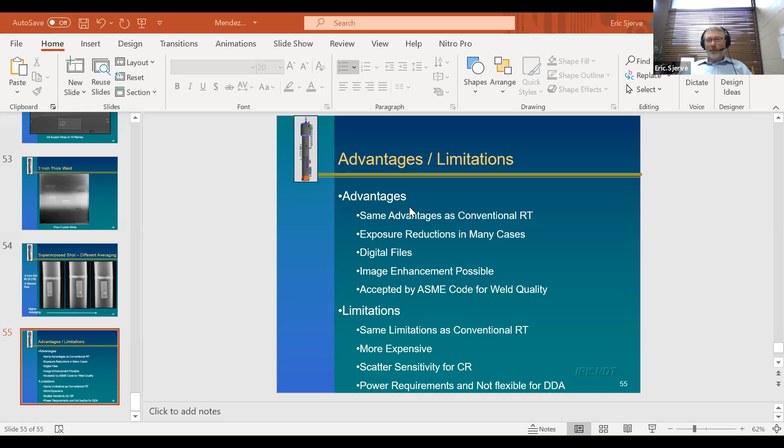Yeah, definitely. Good to know. Thanks.